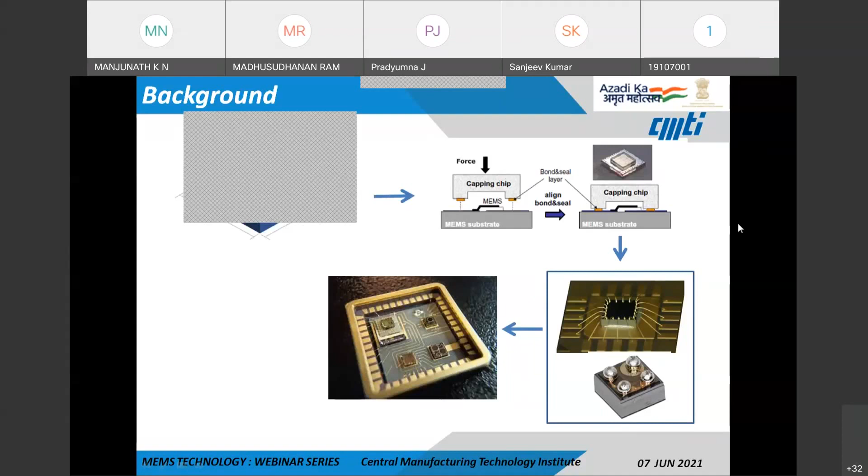Coming to the background, what we have undergone till this session: we have seen how the MEMS chip is fabricated by various deposition and etching processes, followed by protection of these MEMS devices like wafer bonding techniques, wherein we cap the MEMS device by silicon to silicon bonding or glass to silicon bonding. Then coming to how electrical contacts are established between the die and the package substrate or a PCB through wire bonding technique or through FCB technique. So more often we witness that though these devices are fabricated as per design standards, they often tend to fail when put into real-time conditions.

So why do these failures happen? These failures may happen because of poor packaging quality. So let us have a look at how packaging takes a front seat in maintaining the reliability of these devices.

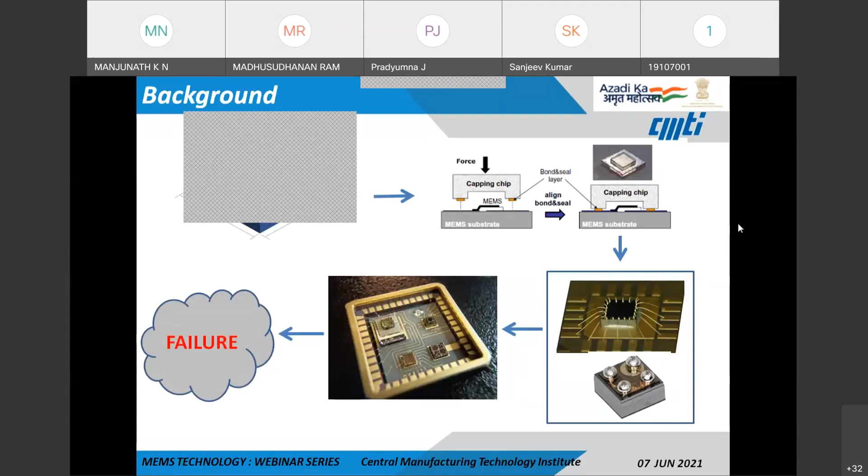Coming to the overview of this package: the development of an IC package or MEMS package is a very dynamic technology wherein every day there is a new advance taking place in the field of IC and MEMS, varying from mobile telecommunications, satellite broadcasting, aerospace and automotive applications. Each of these applications has its own demand on these packages. For example, a space application has a different demand, an undersea application has a different one, and an automobile has a different application. So they actually put demand on these electronic packages, and to meet such diverse range of requirements, these packages encompass over 30 and more different types in the market.

Coming to the purpose, so why do we have to do this package?

Sorry to interrupt, Dr. Pradyumna, there is some mark coming on your screen. Is it possible for you to drag it down somewhere? Yeah, one second. Now it's better, now it's proper, right? Yes, screen is now fine.

Perfect. So the purpose of this packaging is for establishing electrical connections and to aid heat dissipation, and to increase the effectiveness of the surface area to increase convection, wherein these packages give a very good surface area for heat dissipation. That is what it means. And to physically protect these packages or chips, the actual die or MEMS die, from the environment, and also to give a hermetic seal.

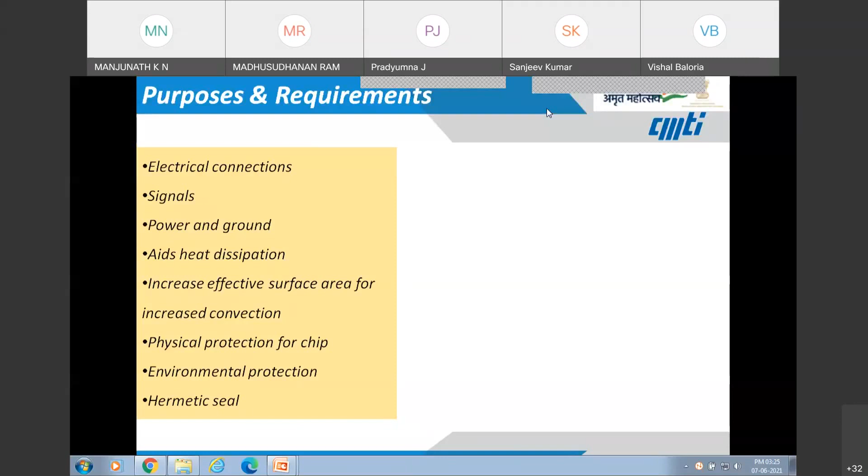Coming to the requirements expected from these packages: with respect to electrical, they have to have low capacitance, low inductance, and low resistance. With respect to mechanical, they have to have a reliable mechanical strength. Coming to thermal requirement, they should have low thermal resistance to get the heat out of the package or from the die to the outside environment. And coming to economical requirement, they should be easy to purchase and also assemble.

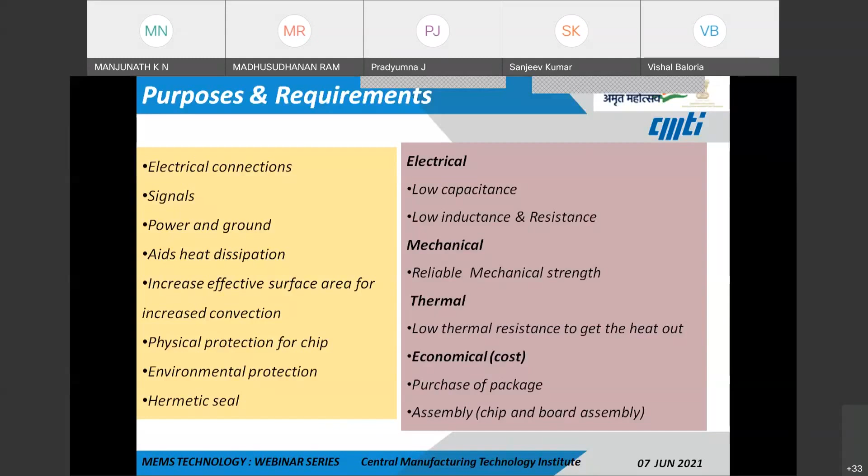Coming to the materials generally used for these packages: plastic, because they are low cost and typically require custom designed packages, so with plastic we can always try to design a custom required package. Coming to ceramic materials, they have better heat transfer characteristics and are also very good for research and prototyping, so these ceramic packages are more often used for prototyping and research purposes. The factors to be considered during selection of these materials are the thermal expansion of these materials, the dielectric constants of these materials, and also the interconnect capacitance.

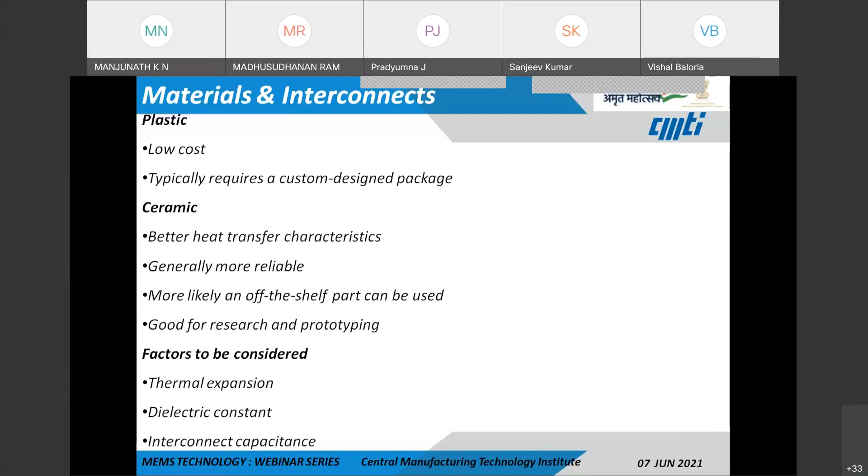So what are these interconnects? We have already studied that these interconnects may extend from chip to package or from package to board. When I say chip to package, it means from the chip to the package, that is through wire bonding or flip chip bonding through solder bumps, which we have already seen in the previous presentations. So let us see these package to board connections, that is through hole mount and surface mount technologies.

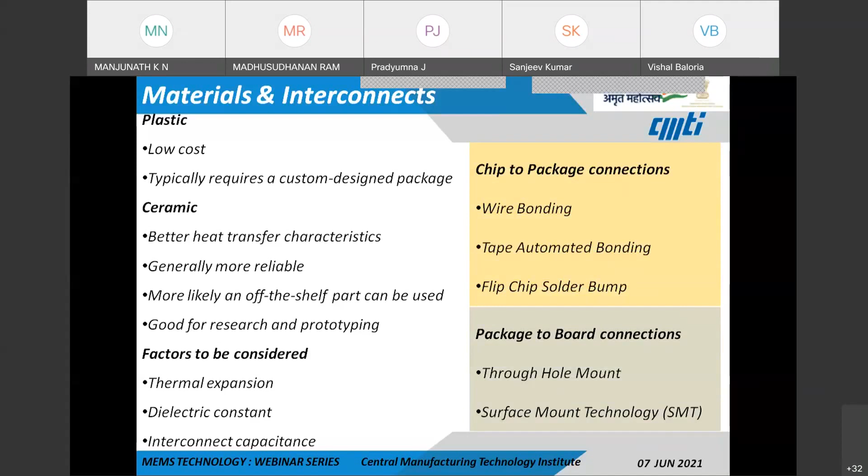Some of the issues of these packagings are reliability issues, that is delamination between the die attach and the die pad, fatigue failures of the interconnects, and fatigue fractures of the solder joints. Coming to the failure mechanisms, it is the mismatch of coefficients of thermal expansion of different materials used in the packages, along with mechanical vibrations, material strength, and environmental effects. These are some of the packaging issues that have to be addressed.

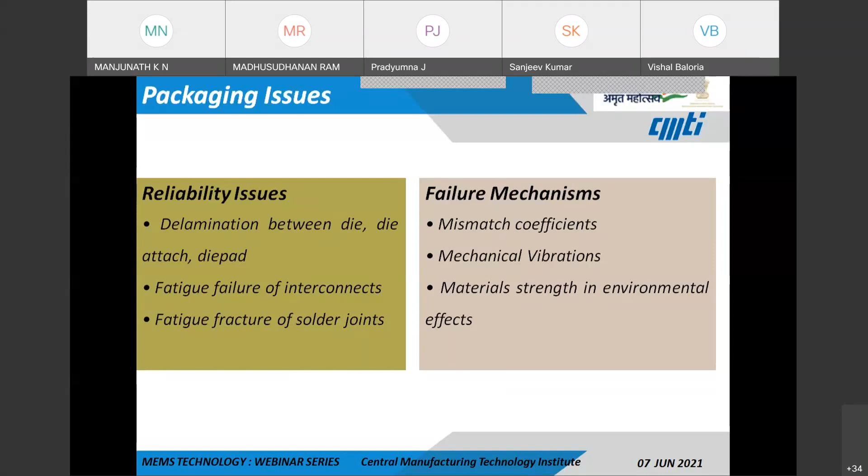Coming to the first mode, that is through-hole mount packages. It basically uses leads which are present on the package, inserted into holes drilled on a printed circuit board which are copper plated. These leads are inserted into pre-drilled, pre-coated holes and then soldered from the opposite side. The chips are placed inside this package. Some features are that they provide a strong mechanical bond, but the drawback is the additional requirement of drilling, which makes production a bit expensive. So usually these techniques are reserved for bulkier components such as electrolytic capacitors that require additional mounting strength.

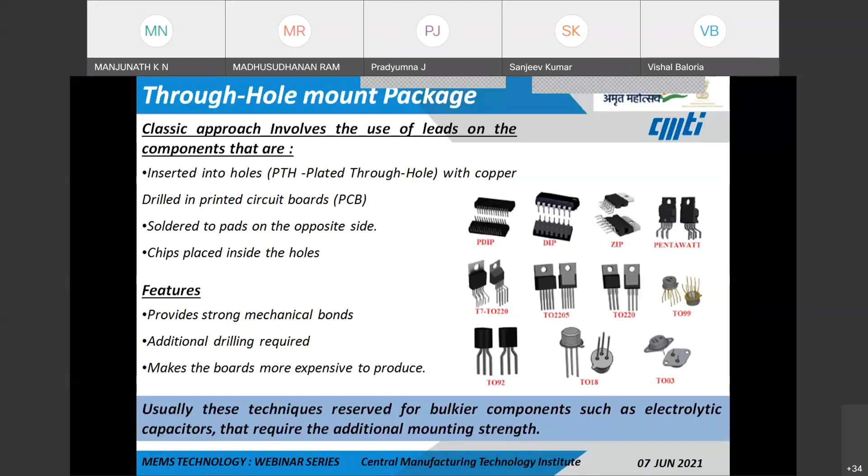Coming to the next one, surface mount packages, which has largely replaced through-hole technology. Here the components are very small and directly mounted onto the PCB. Chips can be mounted on both the front and back sides of the board, giving more room for wiring inside the PCB and allowing the PCB to be stronger. This also reduces the space between the package leads, meaning it has either small leads or no lead at all, with a very short pin, flat contacts, or a matrix of solder balls. We have seen BGAs, the ball grid arrays, in the previous session. This also offers low resistance and inductance at the connections, which is a feature of surface mount packages.

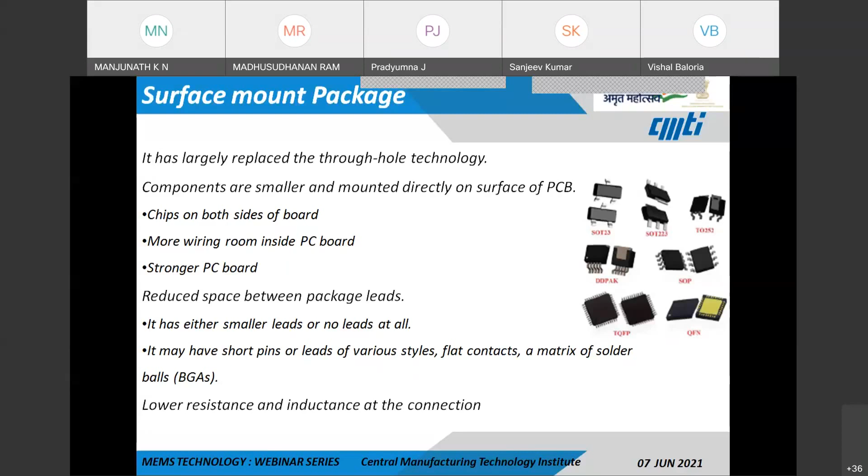Coming to microsystem package: its purpose is to provide support and protection to the delicate core elements, that is the dies. These dies may be either a MEMS die or an ASIC, to protect the wire bonds and transduction units from mechanical or environmentally induced damages like heat and humidity, or any other environmental damage for that matter.

Though this packaging industry is a very thankless industry, it is a $125 billion worldwide market which employs more than 1 million people. It mainly focuses on miniaturization and integrated systems. It can be photonics, MEMS, RF devices, or it involves system engineering, that is engineering of these packages.

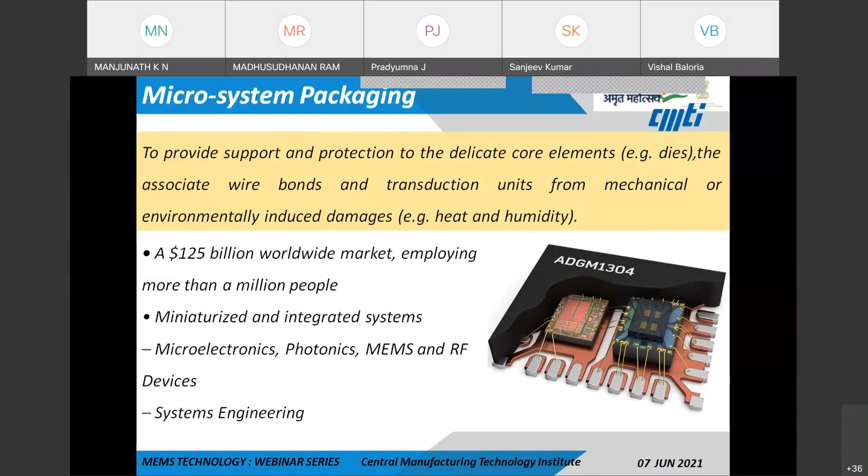When we see the packaging trend from 1980, it started with the multi-chip module, that is MCM, where chips are mounted on a 2D plane of the package, consuming quite an amount of the real estate of the package, till the heterogeneous integration, which is the current trend, where the IC chips are stacked one above the other, with more efficient outputs from these chips.

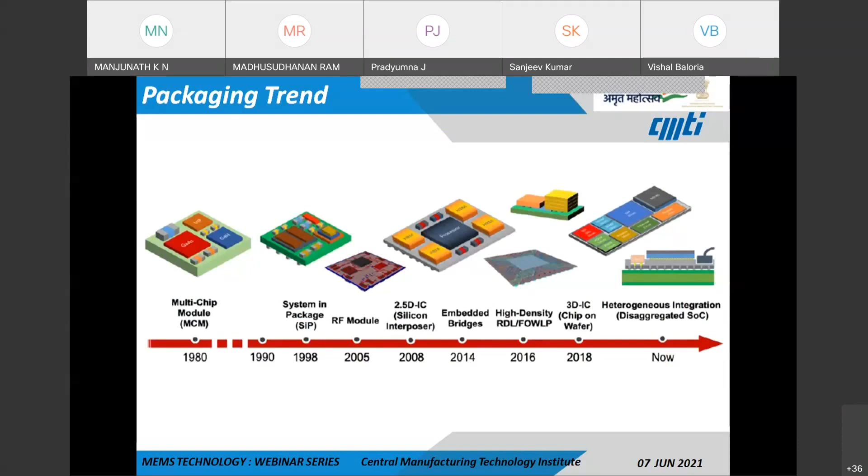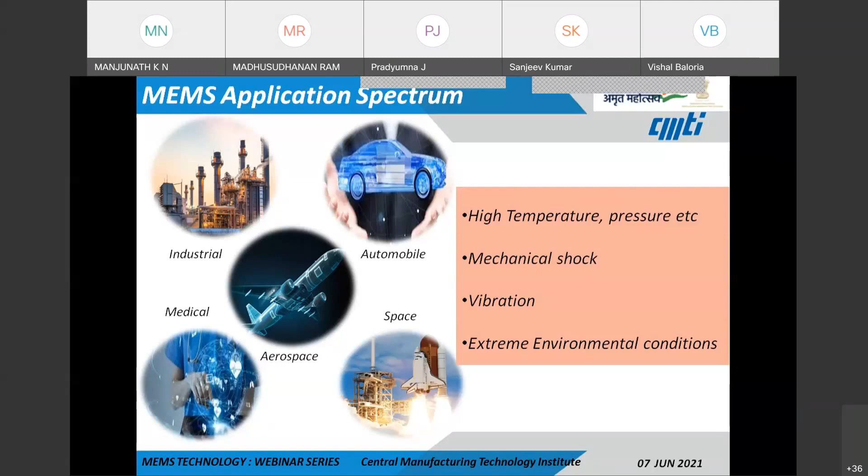Coming to the application spectrum, we can see that MEMS can be applicable in industrial, automobile, medical, aerospace, and space applications. In all these applications, these devices are subjected to very high temperatures, very high pressures, and other types of mechanical shocks and vibrations, and extreme environmental conditions as in space applications. So to address these issues and to make the chips perform their intended duty, good protection is necessary from all these hurdles.

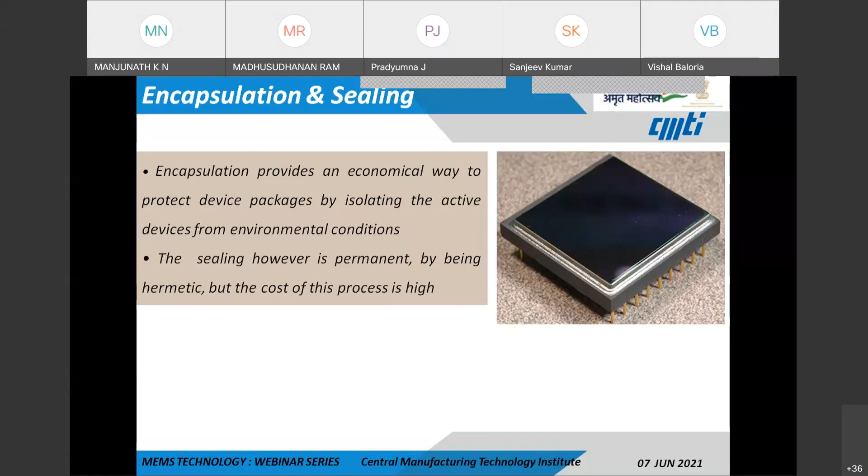So encapsulation is required for these devices or the chip. Basically, encapsulation provides an economical way to protect the device package by isolating the active device from environmental pollutants. At the same time, it also offers mechanical protection by structurally coupling with the device package material and provides robustness to the package. This sealing, however, is permanent by being hermetic, but the costs of these processes are very high, having cost implications.

Hermetic seal, when I say, is a type of sealing that makes a given object airtight, preventing the passage of gases—can be any gas, air, oxygen, or any gases—to and fro from the device. Hermetic seals are also essential for the correct and safe functionality of many electronics and healthcare products, and these seals are used in many such products.

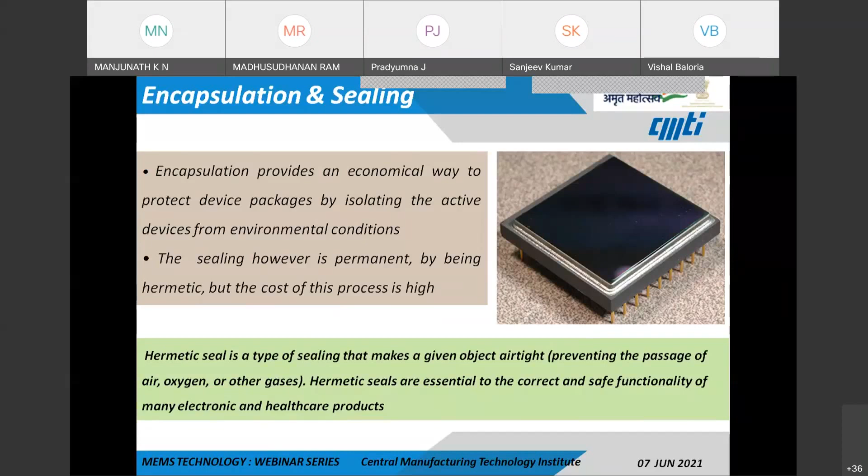So for encapsulation and sealing, some of the features to look into are its dimensional stability, its resistance to thermal excursions, its permeation resistance providing isolation of environmental pollutants, and its thermal dissipation, providing dissipation of the heat generated by the package to the outside environment. Basically, hermetic seal follows the MIL standard 883.

A hermetic seal is one that will indefinitely prevent the entry of moisture and other contaminants into the cavity. But such a seal does not exist in nature.

If we see in the graph, there are different types of materials wherein the non-hermetic materials like epoxies, silicones, fluorocarbons, and organic polymers, when used as packaging materials, can only last for maximum up to days, or sometimes only hours. The permeability is shown on this y-axis.

When we see the other part of the graph where hermetic materials are present, like glass, silicon nitrides, metals, and pure crystals, packages made out of these types of materials happen to have hermeticity for about tens of years.

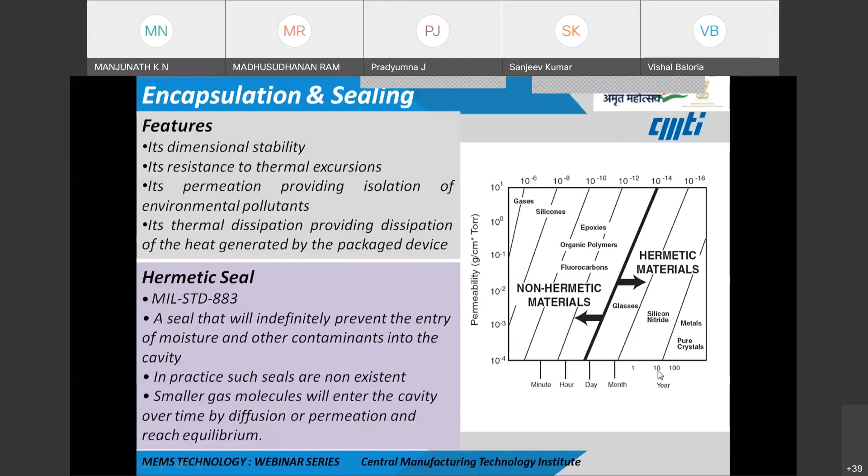One such method of making a hermetic seal is parallel seam sealing. The basic principle is that a seam welder is intended to deliver multiple overlapping weld spots, creating a continuous weld joint, joining a metal lid to a metal or ceramic package which contains an electronic MEMS device inside. So we get to see a metal lid, the body, and the electronic device being placed inside the package, and then they are being sealed.

It is basically a type of resistance welding where the power supplied is passed through tapered electrodes, where you see the weld current passed through these tapered electrodes. Since the resistance of this interface is higher than that of either the lid or the case, the heat gets concentrated at the seal and reaches almost 1500 degrees at the interface.

The other part of the device will be at much lower temperatures. Because of these high temperatures, they tend to volatilize the contaminants, so the weld will be a contaminant-free weld.

There is also an application of pressure by the electrodes to hold the lid and case, which often accommodates a fair degree of non-flatness. Even though there are flatness issues with the base and the lid, the application of pressure by these two electrodes accommodates this. These cases are generally held by fixtures which have good thermal conductivity, that is, they remove the heat produced by the welding.

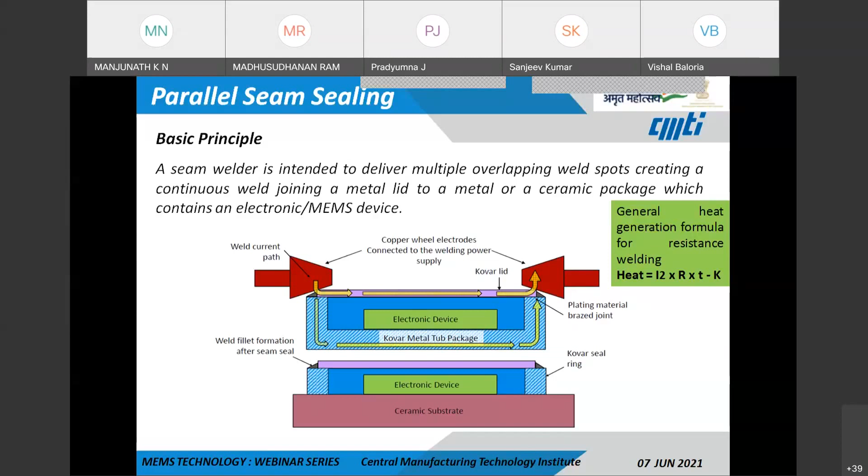The most common process in seam sealing uses two roller electrodes moved along the opposite side. The electrodes move on opposite sides, and the travel speed is set so that the weld stitches or overlaps without making the weld unnecessarily wide.

We see here that there are weld spots which overlap each other, and the taper angle of these electrodes is generally 12 degrees, which affects both the weld penetration and the uniformity of the heating of the lid case interface.

As the electrode force increases, the temperature control becomes less critical, but the contact resistance goes down and more heat is conducted between the lid and the package, and the welding happens. The resultant weld is more homogeneous but requires higher power, and the body of the component gets a bit hotter.

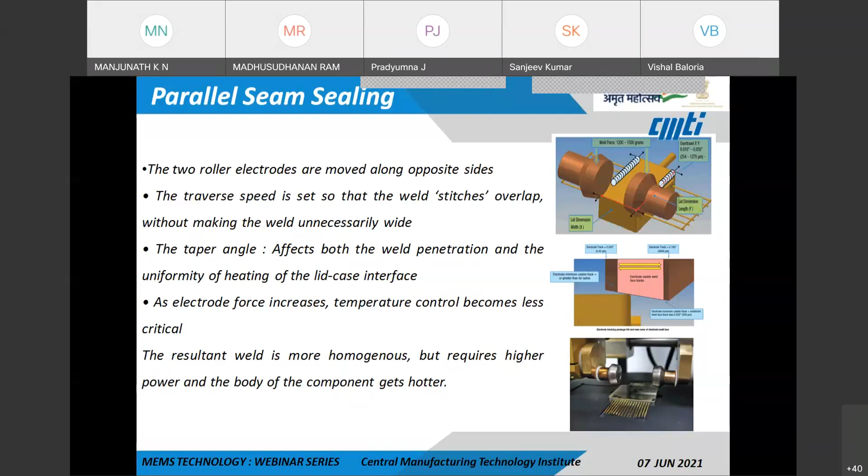In parallel seam sealing, the most common material used is Kovar because it has a coefficient of thermal expansion close to glass, which prevents the glass seal from leaking due to material expansion from heat generated in the welding process. Typical materials are Kovar, nickel, and ceramic bases.

The lip of the lid, shown here, must be thin enough, typically 100 to 150 microns in thickness, which allows the seal interface to reach welding temperature very quickly, whereas the other portion of the lid will be at a lower temperature. The center of the lid can also be a thicker portion, which gives mechanical stability to the package.

For rectangular or square packages, the weld is accomplished in three phases. The first phase is spot or tacking, where only one weld is generated, followed by the first seam, where the first run is done on one axis, then the package is indexed and the second run is done.

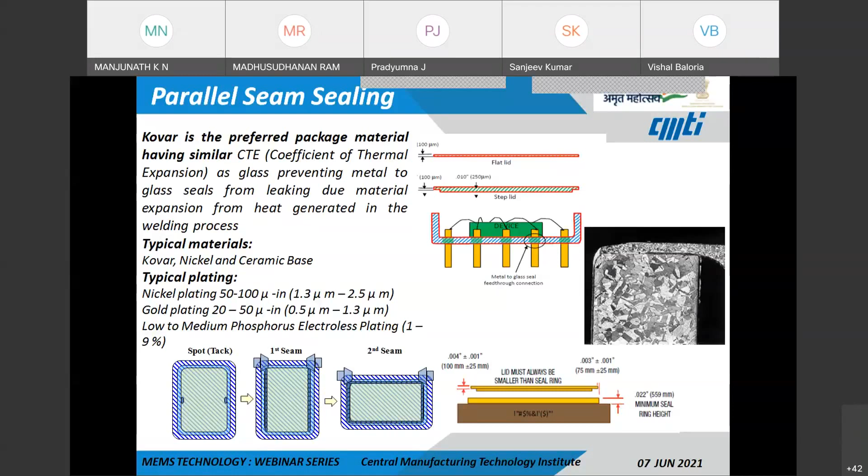There is one more type of seam sealing called opposed electrode seam welding. This is usually carried out on circular packages, wherein energy is passed from one electrode to the other through a flange of the package. The resistance between the header and the cover results in buildup of heat, and eventually the piece is fused.

Here we see there are two portions: the bottom portion and the top, which is the header portion. We get to see slight projections here. When heat is supplied, these projections tend to fuse into the material and help provide a better weld quality.

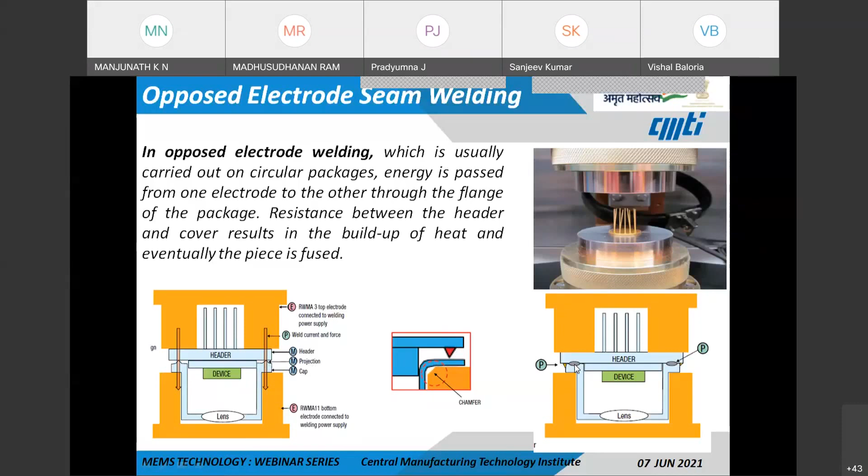Piece sealing is done piece by piece, so the yield rates are very high. At high temperatures, highly reliable nickel can be used for the electrode material since it has a high melting point. There's also rapid cooling. These are some of the advantages of the seam sealer.

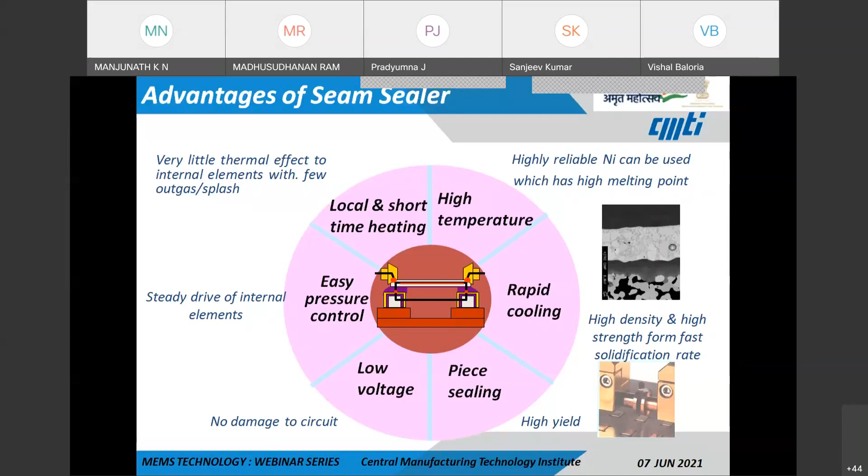Yet another process of having a hermetic seal is through E-beam welding. This technology was basically invented by a German physicist, Dr. Karl-Heinz Steigerwald. Basically it is a fusion welding process in which a beam of high velocity electrons is applied to two materials to be joined.

These free electrons in vacuum can be accelerated along their path, controlled by electric and magnetic fields. In this way, a narrow beam of electrons carrying high kinetic energy can be formed. By controlling these paths with electric and magnetic fields, upon collision with the atoms of solids, their kinetic energy is transformed into heat energy.

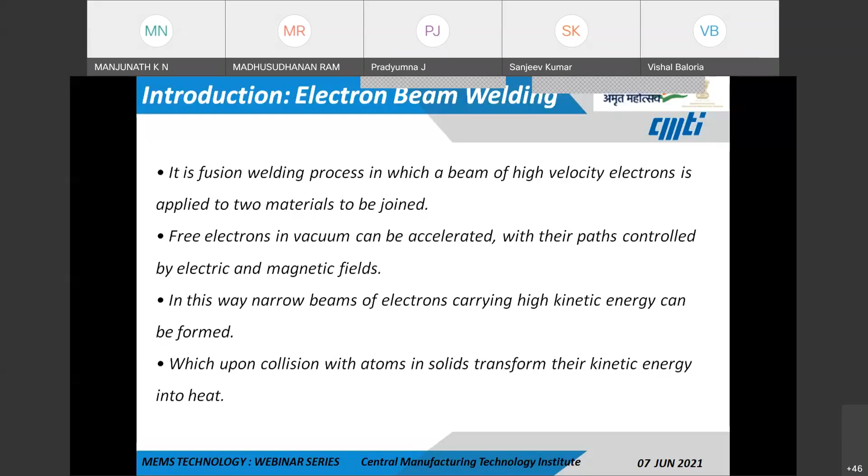Coming to E-beam welding applications, it has a wide spectrum of uses, being applied in rockets, locomotives, automobiles, healthcare. So it is used everywhere.

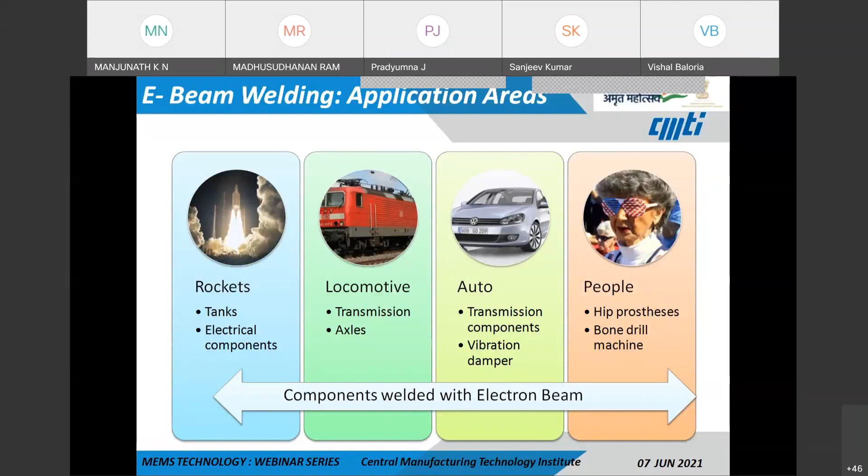The principle of operation is that electron beams are composed of electrons, which are charged particles that can be accelerated in electron guns to high velocities, giving them high kinetic energy. Although the mass of these electrons is about 9 into 10 power minus 31 kg, which is very negligible, due to their high acceleration they impart high energy into the workpiece.

At 10 kilovolts, the electron travels at approximately 20% of the speed of light. And when accelerated to 200 kilovolts, they travel nearly close to the speed of light, that is almost 70% of the speed of light.

This electron beam welding process is carried out in a vacuum chamber. In this process, electrons are emitted from a heated filament called cathode. These electrons are excited by applying a high potential difference, that is 30 kilovolts to 175 kilovolts, between the cathode and the anode. The higher the potential difference, the higher the acceleration.

The electron speed may range from 50,000 kilometers per second to 2 lakh kilometers per second. This is the magnitude of velocity at which these electrons travel from the gun to the workpiece. With this high kinetic energy, the electron beam strikes the workpiece, high heat is generated, resulting in melting of the working material. The molten metal fills into the gaps of the workpieces to be joined.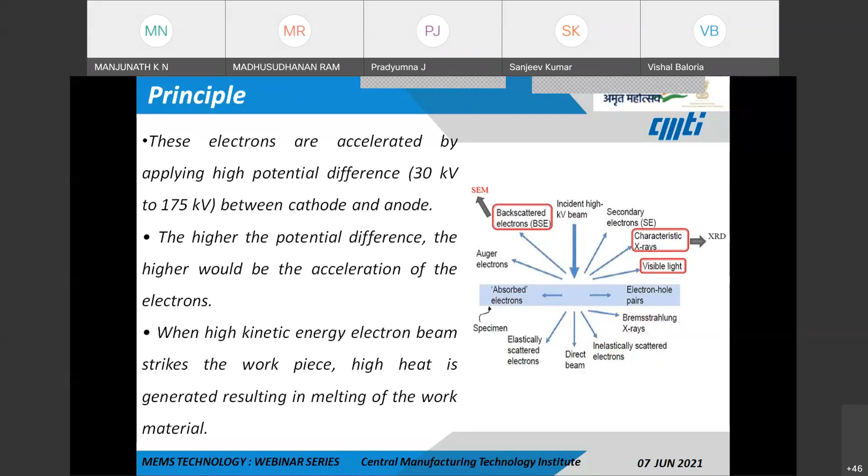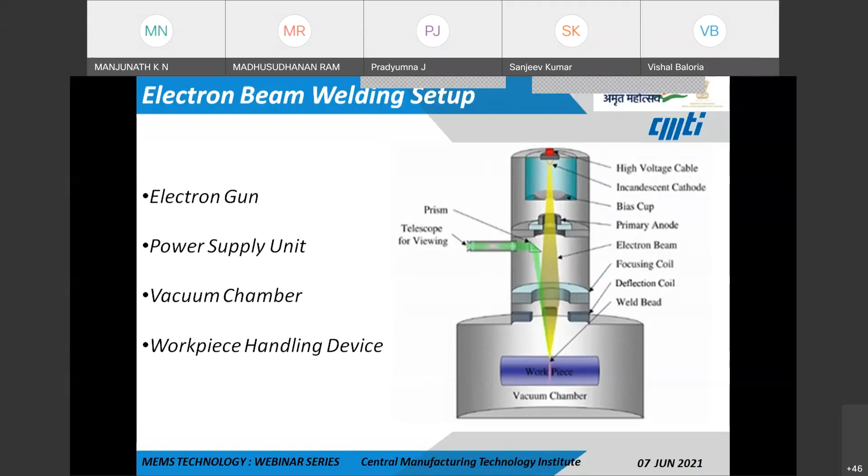The electron beam welding setup basically consists of four stages: the electron gun and the power supply unit, which constitutes beam generation, beam forming and beam guidance; the vacuum chamber, that is the workpiece holding chamber; and the workpiece handling devices. These are the four setups in the electron beam machine.

Coming to the electron gun: the electron beam is most often formed by the triode style of electron gun under high vacuum conditions. These triodes are basically an assembly of electrically amplified vacuum tubes, consisting of an electrode, a heating filament or cathode, a grid plate, and an anode.

The grid cup is a specially shaped electrode that can be negatively biased with respect to the hot cathode or emitter filament, and the anode is a ground potential electrode. The hot cathode emitter filament is made of high emission materials, usually tungsten or tantalum, which is usually available in the form of wires, ribbons, or sheet form.

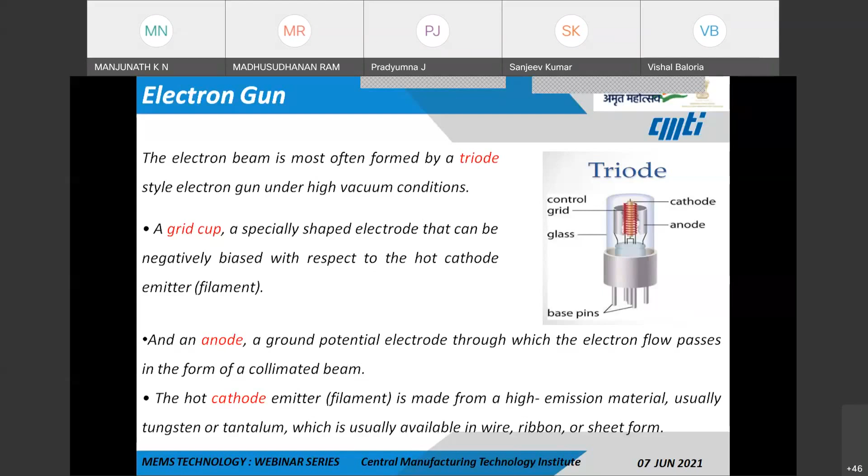Coming to the types of guns, there are 2 types: self-accelerated and work-accelerated. In the self-accelerated type, the electrons are accelerated by applying the potential difference between the cathode and the anode. Whereas in the work-accelerated type of gun, the potential difference is applied between the workpiece and the anode.

Coming to the parts of this gun, there is an emitter filament, which is the main source of electrons, which upon heating generates electrons. The anode is a positively charged element near the cathode, across which high voltage is applied to accelerate the electrons. For high voltage equipment, the potential difference will be around 70 to 150 kilovolts, and for low voltage equipment it will be around 15 to 30 kilovolts.

Coming to the grid cup, a negative voltage with respect to the cathode is applied to these grid cups. So the grid cup controls the electron beam.

Coming to the electron beam focusing, it has 2 parts. The focusing is done by 2 elements of this electron gun: the focusing lenses and the deflecting coils. The focusing lens reduces the diameter of the electron beam and focuses the beam down to a much smaller beam cross section at the plane of the workpiece. With the help of these focusing lenses, we bring down the diameter to the minimum possible, which will be focused on the workpiece.

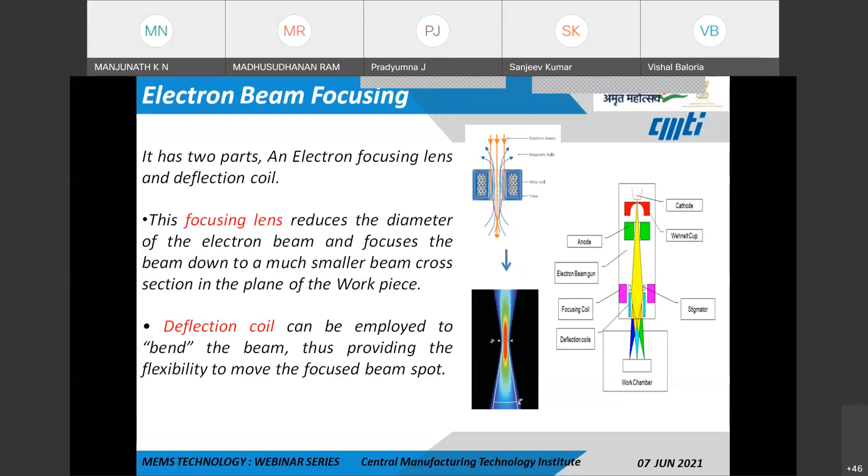Coming to the deflection coil, they are employed to bend the beams. It also provides flexibility to move the focused beam from the spot. Here is an example of this deflection: we see 4 coils which are magnetized and homogeneous in their fields, and the beam spot is at the center. Once there is a change in these magnetic fields, the beam tends to drift its position. This is how beam deflection is carried out.

Coming to beam shaping, with the help of these lenses, we can also shape the beam, changing the shape from a perfect round shape to an elliptical shape, by changing all these magnetic fields to different values. With this beam shaping, we get different shapes of these beams: the first one is a single spot with a circular beam shape, here we get a shape in the form of the number 8, and here we get a shape in the form of an arrowhead. When we see the cross sections of these beam shapes, it looks like this. These beam shapes can be applicable for various applications.

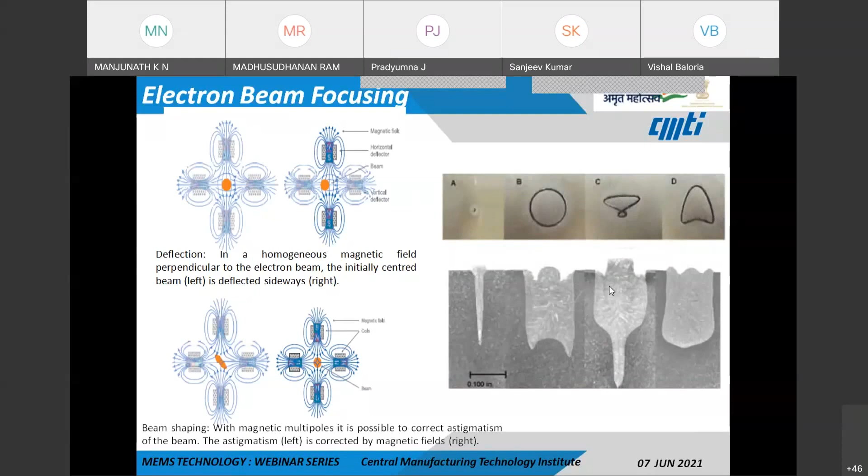Coming to the next one, that is the power supply. It mainly consists of high power DC supply for the gun, focusing and deflection coils. These are the main 3 units which will be consuming more power. The power also provides power for accelerating the electrons. The potential difference of a high voltage equipment ranges from 70 to 150 kilovolts, and for low voltage it is 15 to 30. The current levels range from 50 to 1000 milliamperes, and the amount of current depends on the diameter and type of filament.

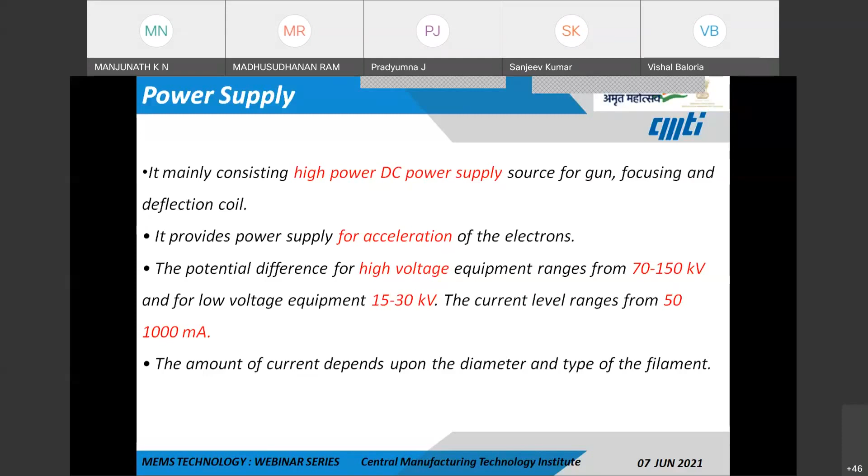The next one now is the vacuum chamber. Generally E-beam welding is performed in a vacuum chamber. The gun portion, where the gun is present, is also kept under vacuum. This is because the gun has to be maintained very clean, to prevent the filament from oxidation, and to impede high pressure short circuiting between the cathode and the anode.

When the E-beam process happens at a vacuum level, here's a classical example where the gun is maintained at a negative pressure, at vacuum of 10 power minus 4 millibar, but the chamber is maintained at atmospheric pressure. Once the beam enters the chamber, there is dispersion of this beam, and the actual beam power is not being utilized by the workpiece.

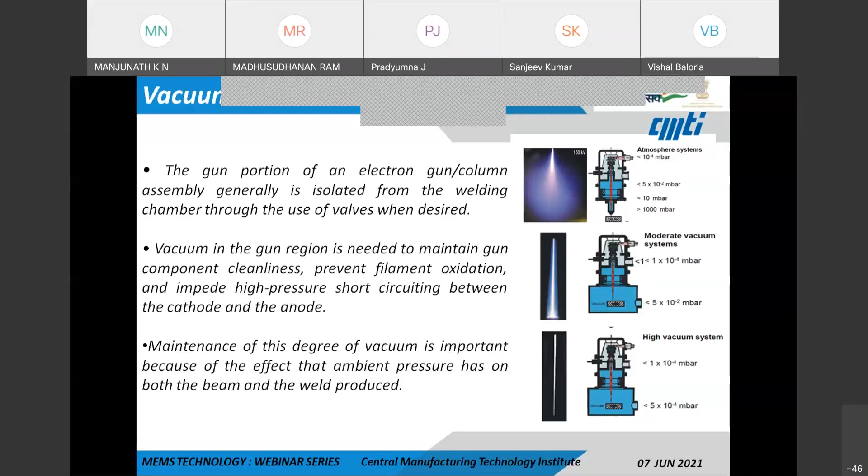Once there is a moderate vacuum, with the gun still at vacuum and the chamber at a moderate vacuum level, the beam starts to converge. At a very high vacuum, less than 5 into 10 power minus 4 millibar, the beam size and beam spot become very defined and narrow down to the workpiece. The maintenance of this degree of vacuum is important because it affects both the beam and the weld produced, and the quality of the weld depends on the vacuum.

The next thing is workpiece handling. The quality and precision of the weld profile depends on the accuracy of the movements of this workpiece, and there is also provision for movement to control the weld speed. Generally these workpieces are controlled by a CNC controlled XY table or a rotary table, which are synchronous with the parameters of the electron beam gun.

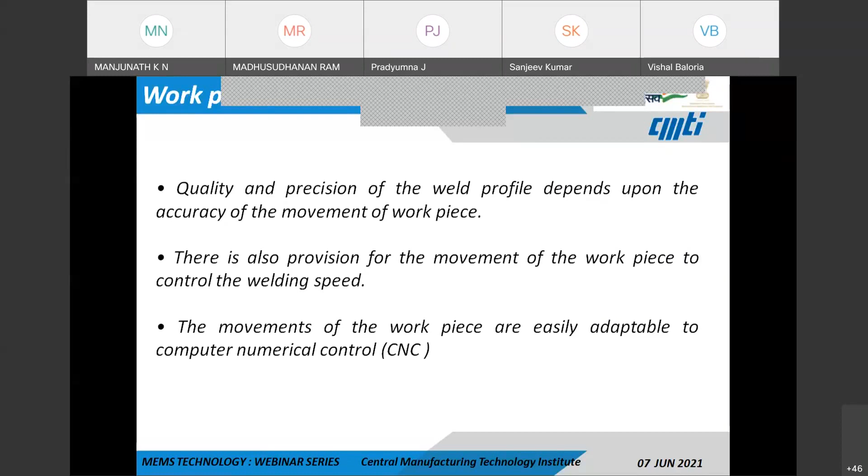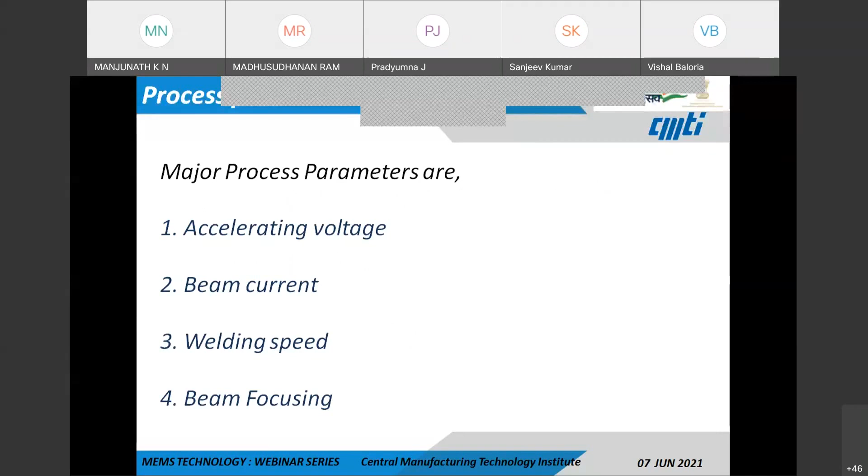Coming to some of the process parameters which govern the welding: they are majorly the accelerating voltage, beam current, the welding speed, and the beam focusing. These are some of the process parameters which decide the quality of the weld.

Coming to the accelerating voltage: the potential difference between the two electrodes, that is the cathode and the anode, is usually in terms of kilovolts, and is being accelerated to increase the electron energy.

The increase in voltage results in an increase in the speed of these electrons. At lower electron accelerating voltages, the speed of these electrons is slightly negligible, around 20% of the speed of light, which is 3 into 10 power 8 meters per second. When the accelerating voltage is around 200 kilovolts, they travel almost to the speed of light, about 70% of the speed of light.

The next parameter is the beam current. The beam current is a measure of the quantity of charges, that is the number of electrons, usually expressed in milliamperes, that flow per unit time in an electron beam, which basically defines the electron flux passing at the beam spot. There is a close relation between the electron beam current and the depth of penetration. This graph gives a better idea of how the beam current will dictate the depth of penetration of the material.

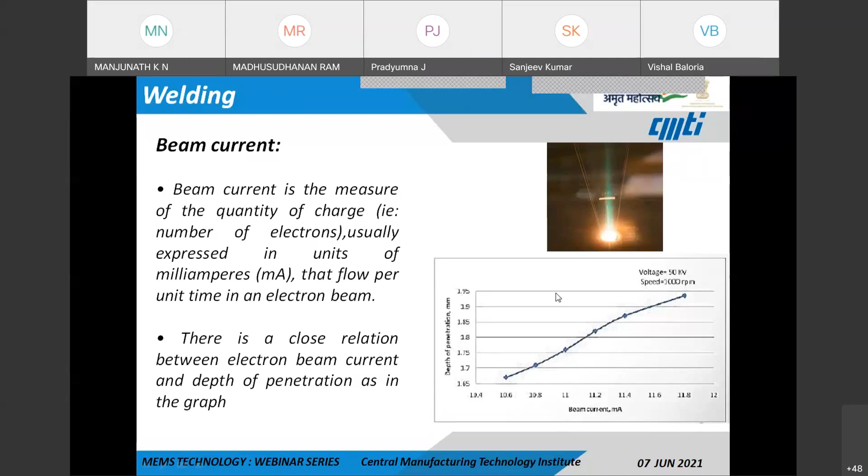Yet another parameter is the welding speed, which directly affects the depth of penetration of the electron beam into the workpiece. Higher speeds result in lower depth of penetration. This graph clearly shows that even with higher accelerating voltage and closer distance to the workpiece, a higher welding speed gives very little penetration depth, and vice versa: at lower accelerating voltage, high distance between the workpiece, and lesser weld speed, the depth of penetration achieved is considerably good.

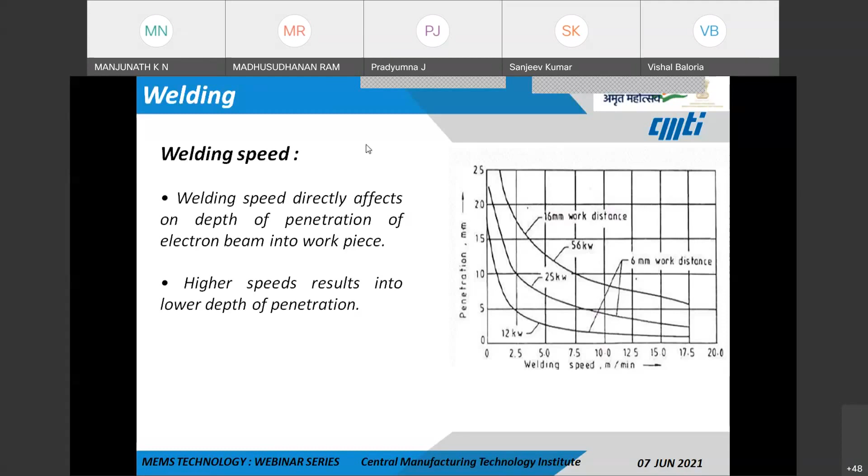So the mechanisms of this depth of penetration: with the high impact energy of these electron beams on the work surface, the penetration depth into the workpiece is very low, just a few microns, and most of the kinetic energy is converted into heat. The high energy density at the impact point causes the metal to evaporate, allowing the following electrons to go deeper. Once these electrons hit first, they transfer heat energy and the metal starts to vaporize.

This allows the incoming electrons to pass through the metal or molten pool of the weld pool, finally leading to a metal vapor cavity surrounded by a shell of fluid metal covering the entire weld depth. This entire hole is covered by a sheet of molten metal. With the action of capillarity, this molten pool rises up to form a weld, resulting in bead formation due to the capillarity action of this weld.

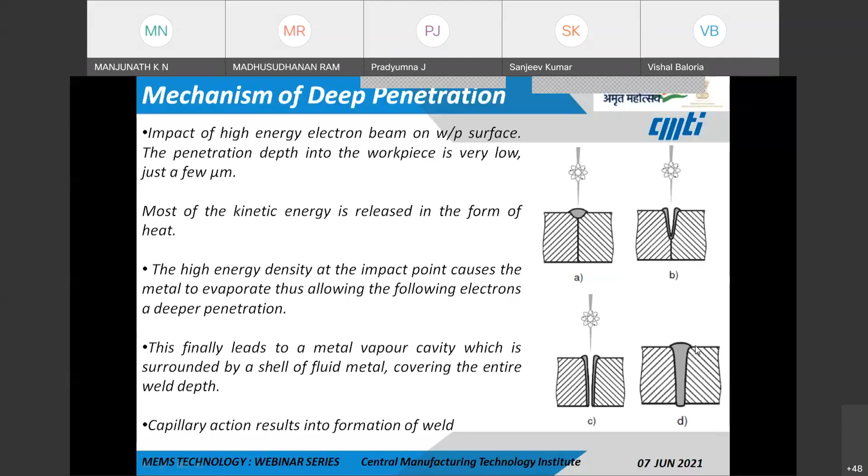With this graph, we can see that once the electron beam comes in, F1 is the force of the vapor pressure of these electrons. F2 is the force resulting from the surface tension of this molten weld pool. F3 is the hydrostatic pressure acting within the system. For equilibrium, the force F1 has to be equal to F2 plus F3.

Now at the front side of the cavity, new material is molten, which to some extent evaporates, but for the most part flows around the cavity and rapidly solidifies at the backside. So we see here that once the electron beam passes through, the melt pool flows back towards the melt pool and then solidifies. That is the reason we see these bead formations.

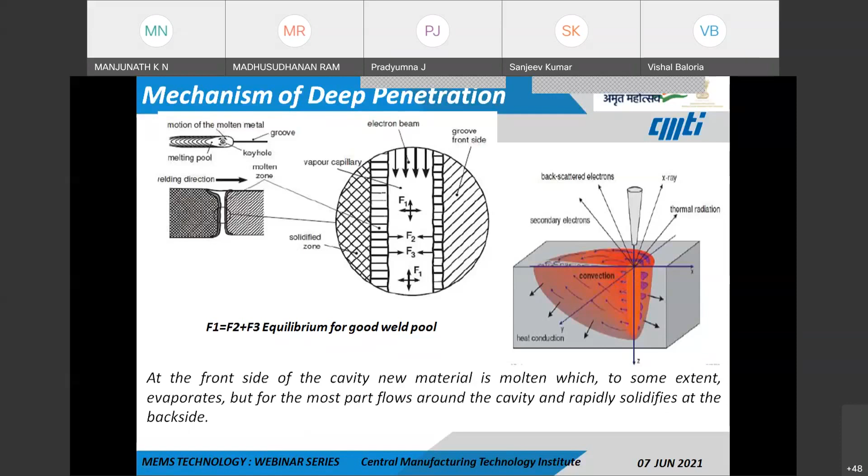So again, welding modes: there are two different modes, one is the conduction mode of welding and the other is the keyhole mode of welding. In conduction mode, the energy is coupled into the workpiece solely through heat conduction, and the heat conductivity of the material limits it to a maximum. We see that the weld depths are very small. These are preferred in applications where aesthetic looks are very important, and they also produce a very smooth weld that does not require any grinding operation once the weld is done.

On the contrary, in keyhole mode welding, the welds are incredibly strong and are indicated for deep penetration and structural welds, where deep welding and structural strength are required. Here, the molten metal flows and fills the voids as the beam travels through the material, and it is generally used in applications like turbine blade welding and valves going into space. So such applications will call for keyhole mode welding.

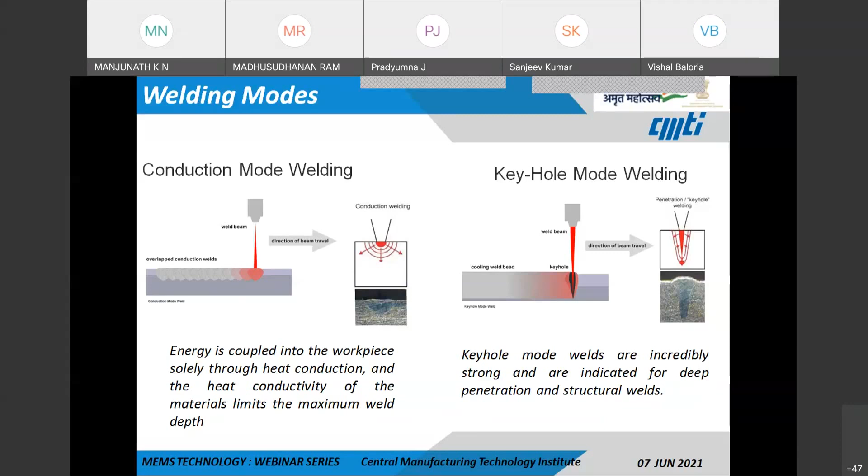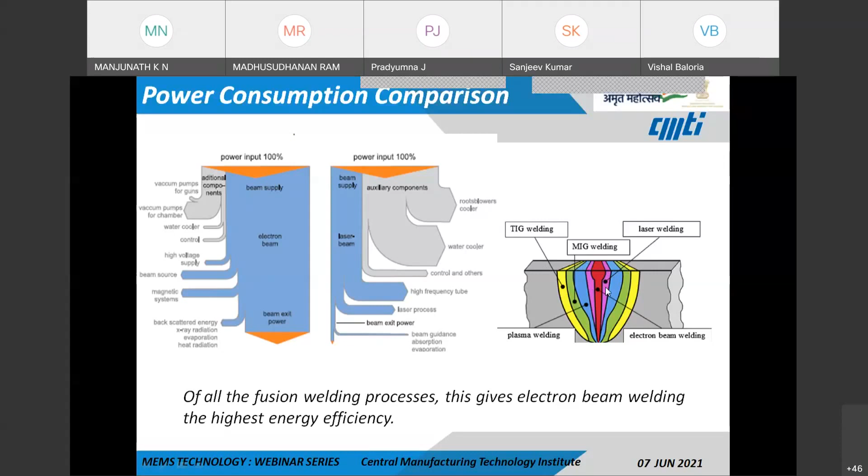Coming to the materials used for e-beam welding, this graph gives a clear idea of what materials are being used: nickel and its alloys, copper and its alloys, titanium, carbon steel, high alloyed steel, and aluminum. These are some of the materials which can be welded along with their alloys. Dissimilar metal welding can also be considered using this graph, for example a weld between nickel and carbon steel, but nickel and cast iron is slightly challenging. The dotted lines indicate that the welding is slightly challenging, while the straight line indicates a better weld quality. So we can always have a ready comparison of the materials which can be welded.

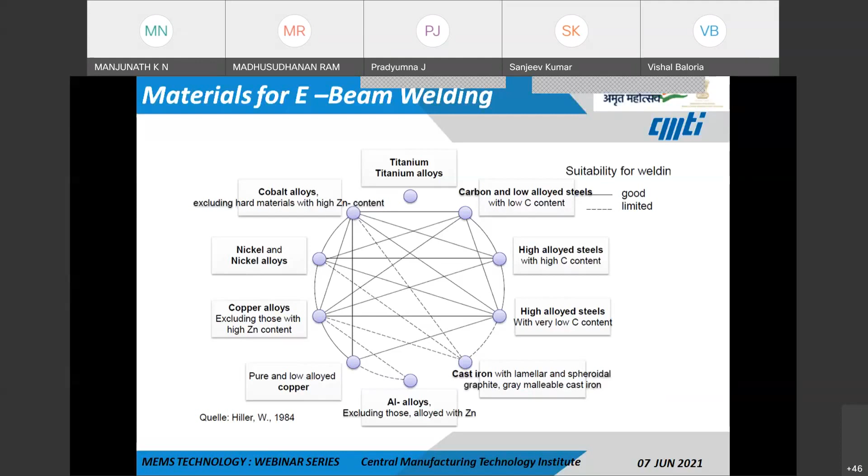Coming to the advantages of e-beam welding: it has high penetration which can be obtained, high welding speed, and materials with high melting temperatures can be welded, such as tungsten. It also gives superior weld quality due to welding in vacuum, meaning these welds are usually corrosion free. Distortion is also less due to the reduced heat affected zone, as shown in the previous slide, resulting in less distortion in the material or grain structure.

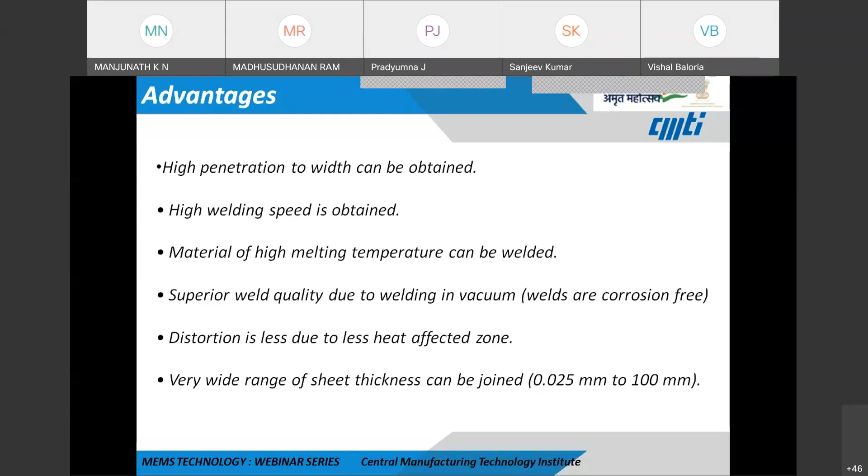And there is a very wide range of materials and thicknesses that can be joined, starting from 0.025 mm to 100 mm. Some of the disadvantages of this welding are that the material has to be electrically conductive, and there are high cooling rates which tend to have a hardening effect, and sometimes the material may crack. There are also high precision seam preparations required.

That is, surface preparations are very much required when going for a weld. The beam may also be deflected by magnetism, so sometimes when using magnetic materials, the beam may not fall on the intended position and will be deflected by these magnetic effects. There is also formation of X-rays, and the size of the workpieces is limited by the chamber size, because chamber sizes are limited by vacuum generation, which reflects on the size of the workpiece. And initial investments for these systems are very high.

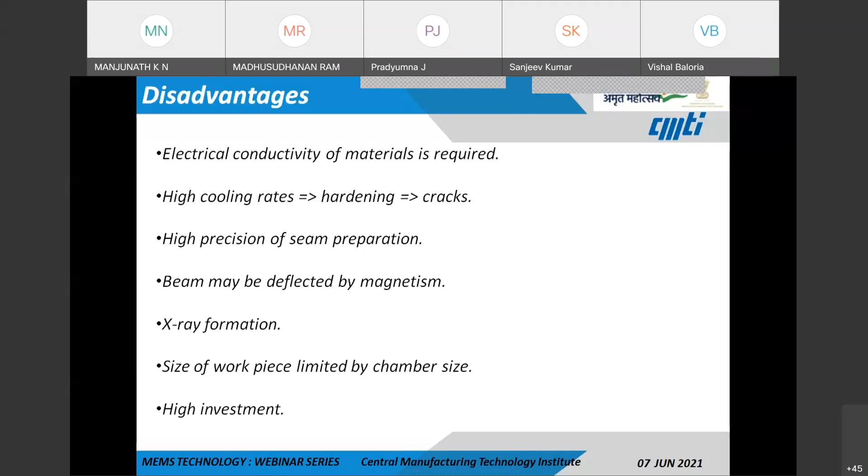So once we are done with this packaging, we also have to check the leak test of these packages. So we also tend to do a leak detection through helium leak detection.

Helium is the best choice to find the leaks because it is non-toxic, inert, non-condensable, and non-flammable, and it is also present in traces of about 5 ppm in the atmosphere. Due to its small atomic size, helium will pass through leaks. Helium is the second lightest gas compared to hydrogen, but hydrogen is not an inert gas.

It is also lighter than neon gas, but neon is very expensive. Helium is also relatively inexpensive and available in pure form. So these are the most widely used gases for the helium leak test. There are other leak detection methods also, but helium leak tests are the most sought-out leak detection tests.

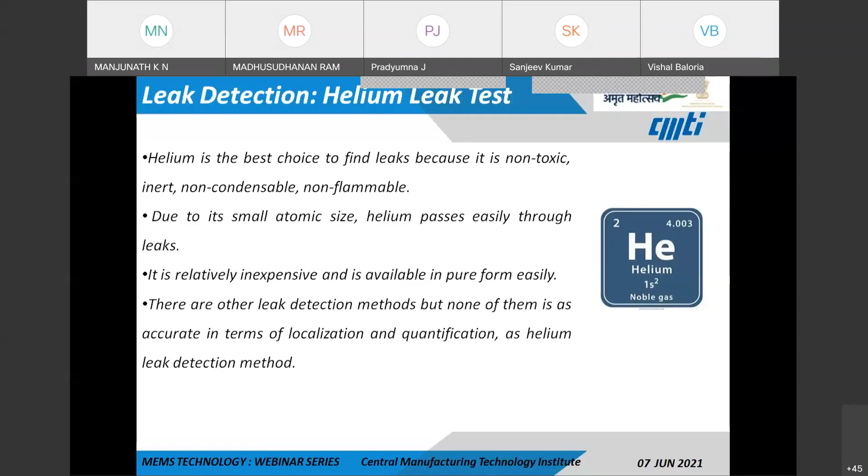So helium leak detection contains the following modules: the mass spectrometer for the leak detector, the control systems and valves which control the individual steps of the measuring cycle from evacuation to testing to venting, and the rotary pumps and turbomolecular pumps.

These turbomolecular pumps are used because if the packaging is carried out at almost 10 power minus 6 millibar in an E-beam welding chamber, these turbomolecular pumps should be capable of reaching much lower vacuum levels, like 10 power minus 11, so that it will create a positive pressure within the package so that the leaks can be tested.

So what happens is, the test specimen, that is the package, is put inside the leak chamber and it is pumped with helium gas.

Because the package is at a negative pressure, having been fabricated at a vacuum condition, and the helium is filled inside the chamber at a positive pressure, it is left for some time, maybe a day. This is what we call the pressure decay test, wherein the helium present inside the chamber will tend to pass into the package.

So the pressures are monitored before and after the helium is pumped inside the chamber. This change in pressure will be a gauge for specifying the hermeticity of this package.

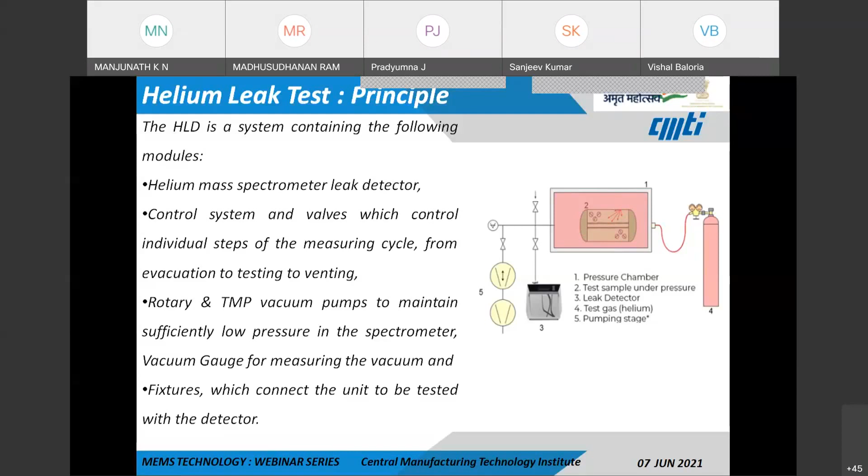With this, we have the helium leak testing machine system at CMTI from Adixen, for the hermeticity and leak measurements of sealed microelectronics. It can go up to 10 power minus 12 millibar liters per second. The applications include bombing leak test and hermetic seal testing per mil standard 883.

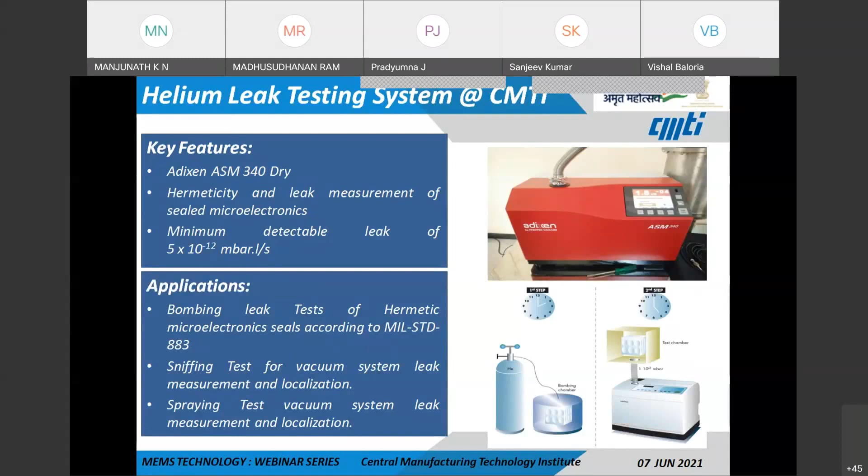Sniffing tests can be performed, and spray tests also can be performed.

Coming to the nitrogen seam sealer at CMTI, they usually handle ceramic and metal package seam sealing applications. Both rectangular and circular packages can be welded, and up to 0.1 MPa of nitrogen positive pressure can be maintained within the chamber.

There is also an attachment with a vacuum bake oven, which can reach up to 250 degrees centigrade. The maximum part size which can be welded or seam sealed here is about 150 mm. So crystal devices, image sensors, MEMS devices, and photonics devices can be welded here.

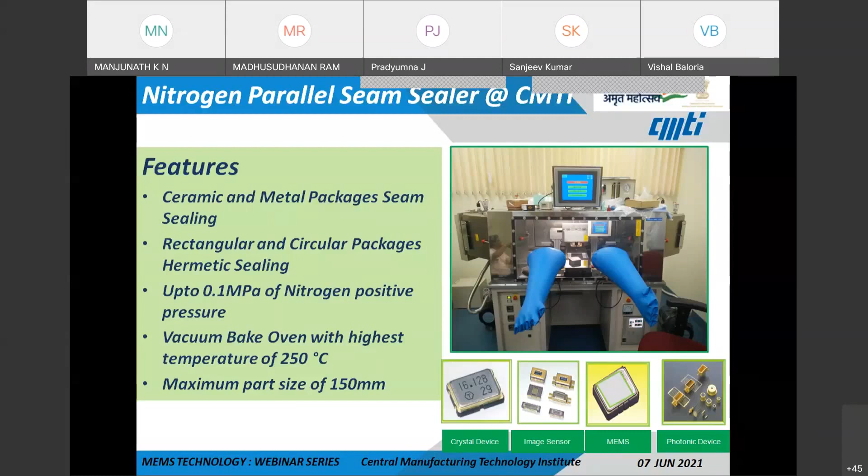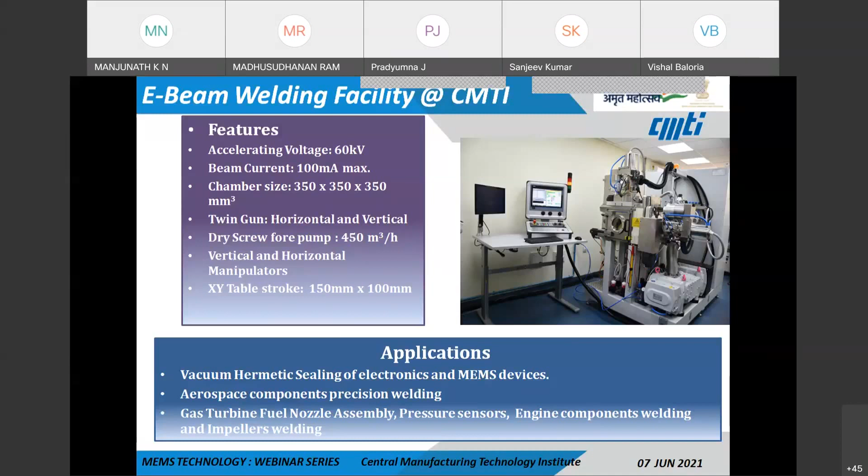It has a horizontal and vertical twin gun, and also a CNC controlled XY and rotary table. The applications here are vacuum hermetic sealing for electronics and MEMS devices, majorly for aerospace components, gas turbines, pressure sensors, engine components, and impeller welding. So these are some of the applications of this E-beam welding, which we are doing at CMTI.

So to summarize, these MEMS sensor packages play a key role in the reliability of these sensors. Also, the packaging material has to be rightly selected based on the application. And also the hermeticity is an important criteria in critical sensing applications.

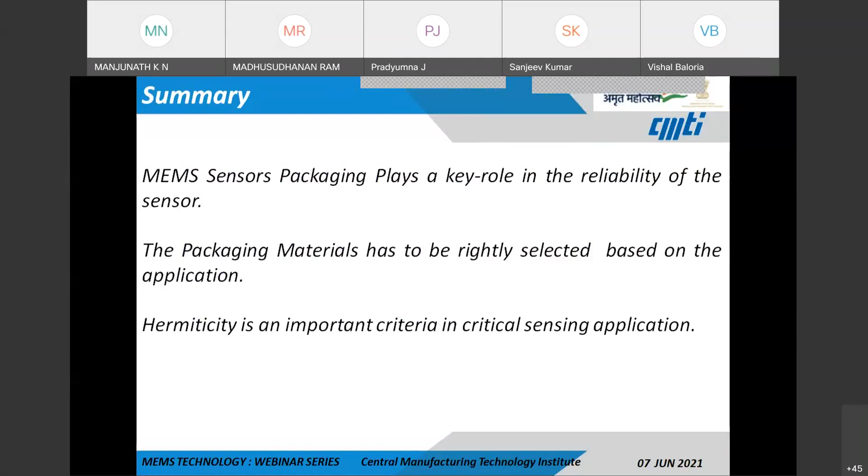So these are some of the inferences of this presentation. With this, I would like to conclude my presentation. Thank you very much.